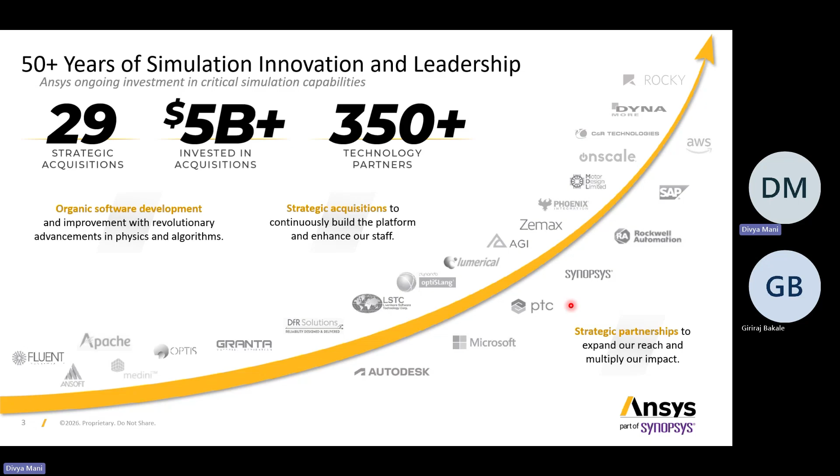And now we are moving on to the core part. Why do we go for simulation? Here's a short video from Ansys.

What do the world's most visionary companies have in common? A superpower. To see the future with absolute certainty. The power to design, to test, and to predict the performance of the most complex products in the universe, all before a single physical prototype is ever built. They summon the world's most powerful engineering simulation solution.

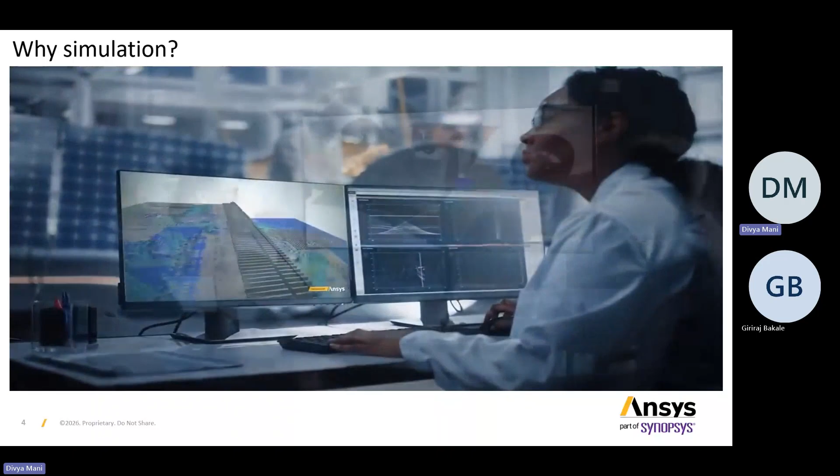I hope you enjoyed the video. Now I would like to add some flavor to the video. Why do we go for simulation? The first and foremost reason is that one can predict the behavior of any component, system, device, or even a scenario virtually, before the prototype is brought into existence.

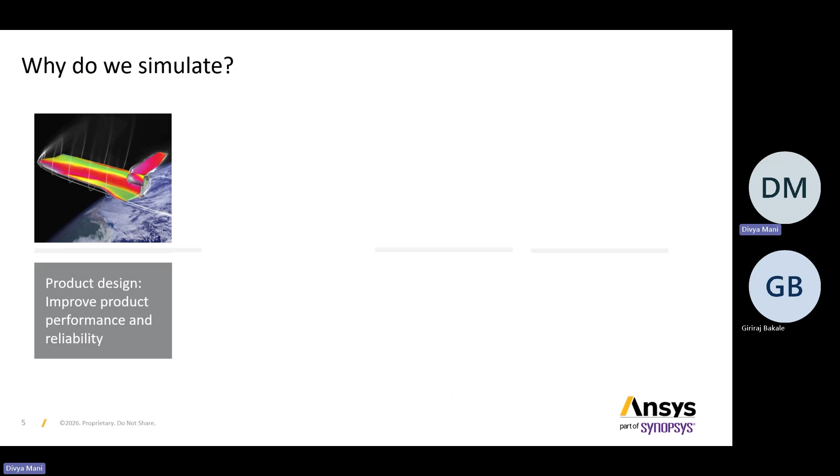On the other hand, if the prototype or the product is not performing well, engineers can use powerful Ansys solutions to optimize its performance, and by doing so, the time and cost of product development comes down drastically.

In case a product fails, we can analyze the in-depth reason for the product failure using powerful Ansys solutions. And finally, when every product comes to market, it has to comply with certain standards like electromagnetic standards - FCC, ISO, CISPR, MIL, etc. - in order to ensure the safety of the equipment, the person, and the environment. All these simulations are virtually possible with powerful Ansys solutions.

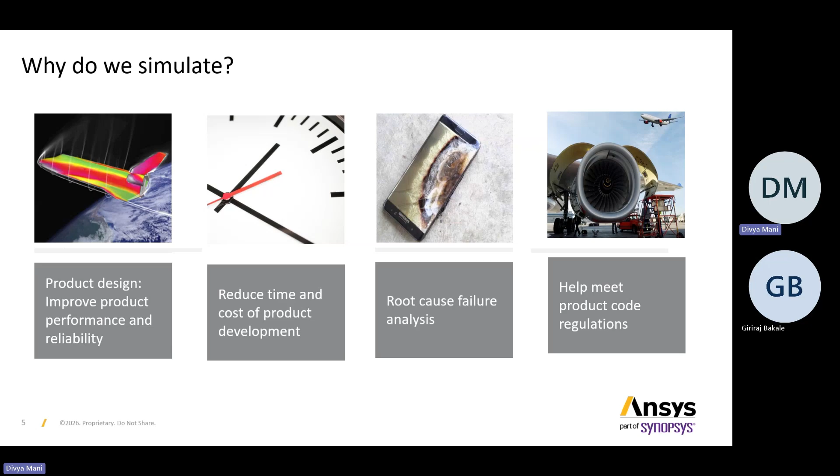To perform such powerful Ansys simulations, Ansys has a simulation portfolio that broadly covers various domains. In case of semiconductors, Synopsys and Ansys have solutions like RedHawk-SC, Electrothermal, Totem, PowerArtist, Raptor-H, Raptor-QU, Exalto, VeloceRF, Pathfinder, PathFX, ClockFX.

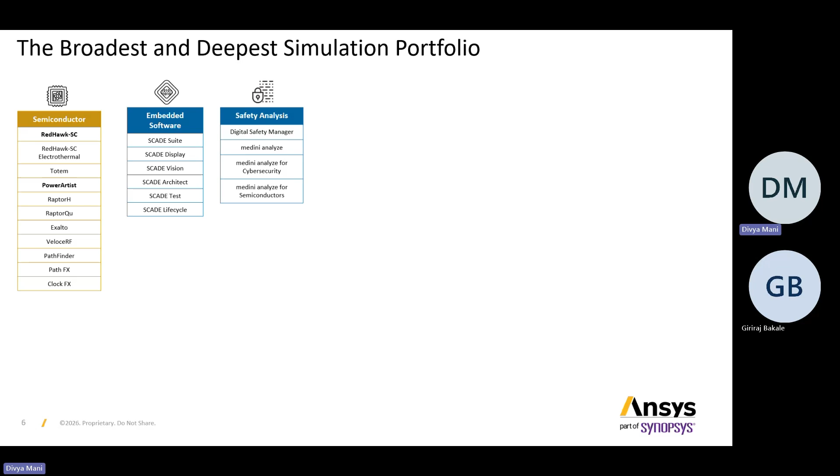For performing simulations related to embedded software, you have SCADE-based packages from Ansys like SCADE Suite, Display, Vision, Test, and Lifecycle. And when you are interested to perform simulations related to safety analysis, Ansys provides many Medini-based packages like Medini Analyze for cybersecurity, and also semiconductors.

Under structures, Ansys provides solutions like Mechanical, LS-Dyna, Forming, Motion, Sherlock, and other solutions. Under fluids, Ansys solutions like Fluent, CFX, Rocky, Turbo Tools, etc. can be utilized.

Moving on to electronics, which is our laser focus today, Ansys provides solutions like HFSS, Maxwell, SIwave, Icepak, Motor-CAD, Q3D Extractor, NuHertz, EMA3D Cable, EMA3D Charge. Among these, MotorCAD and Maxwell come under low frequency electromagnetics, and the remaining solutions come under high frequency electromagnetics.

And for optical domain-based simulations, Ansys provides solutions related to SPEOS, VRXPERIENCE, Lumerical-based packages, and also Zemax packages. And when the user is interested to perform simulations related to materials, Ansys packages like Granta MI, Granta Selector, Granta EduPack, Granta MDS are prominently used.

And for AV-based simulations, Ansys provides software like AVxcelerate Headlamp, AVxcelerate Sensors, and AVxcelerate Autonomy. When you're interested in performing mission-level simulations, Ansys solutions like System Toolkit, Orbit Determination Toolkit are broadly used. For performing sound-based simulations, Ansys has a special software called Ansys Sound.

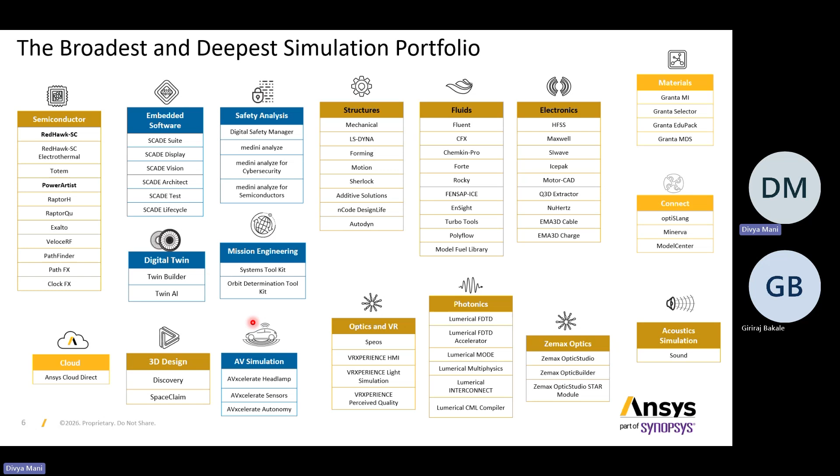Simulation is ubiquitous, where you can find its applications starting from consumer electronics to space.

Moving on to high frequency electronics product collection. First comes HFSS, which is high frequency structure simulator, a powerful 3D simulation software for designing, analyzing, and optimizing RF and microwave components, including antennas, filters, waveguides, PCBs, ICs, connectors, etc. And then comes HFSS IC, which deals with simulations related to a multiphysics and multi-scale platform related to integrated chips. And there is also Q3D extractor, a special software to extract the parasitic RLGC, which is resistor, inductor, capacitor, and conductance parameters from the interconnect structures.

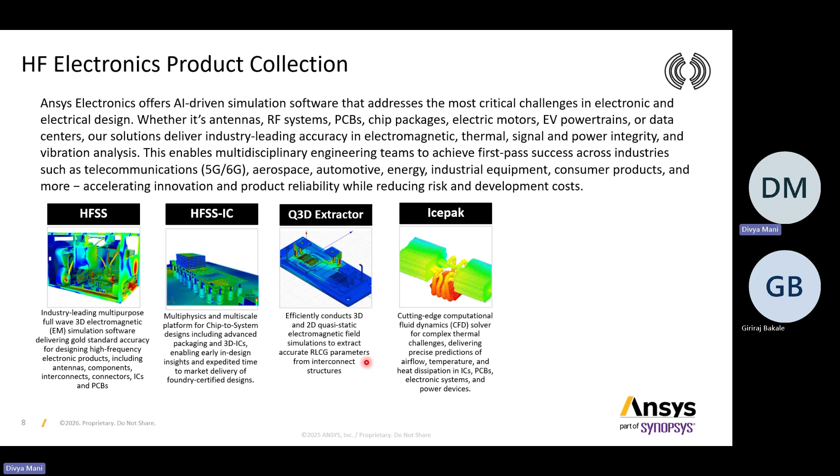Special software from Ansys to deal with thermal-based simulations are Icepak, which performs simulations in PCBs, ICs, electronic systems, and power devices. And then comes SI-Wave, which is signal integrity wave, dealing with simulations related to power integrity and signal integrity concepts inside PCBs, IC packages, etc.

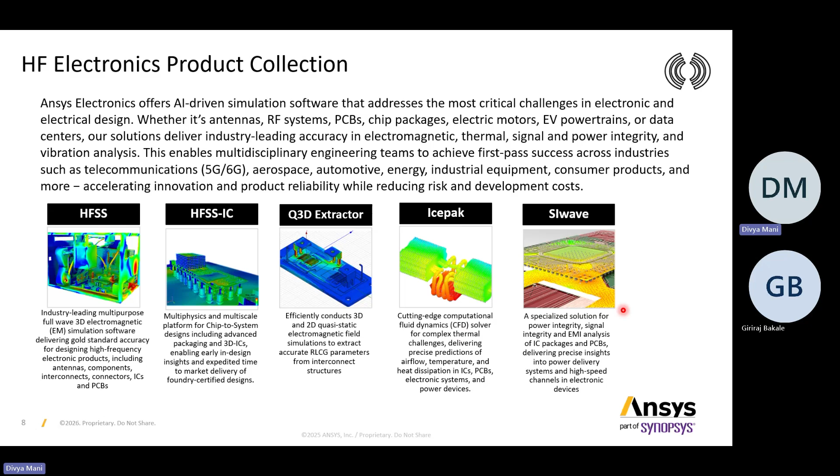As a continuation, we also have EMC Plus that deals with simulations related to electromagnetic compatibility and electromagnetic interference concepts like conductive emission, radiated emission, conductive immunity, radiated immunity, and even cable harness modeling starting from automotive to aerospace applications.

And Charge Plus focuses on simulations related to charging and discharging phenomena like dielectric breakdown, arcing in air, and even lightning effects on aircrafts.

For all filter designers, there are two special softwares from Ansys, that is SynMatrix Filter and Nuhertz FilterSolutions, where SynMatrix Filter will focus on complex 3D filter designs like ceramic filters, SAW filters, SIW filters, and cavity resonator filters. And then comes Nuhertz FilterSolutions, which deals with software simulations related to planar filters that are loaded with lumped elements, and it is very fast because it is automated with AI.

Using powerful Ansys solutions, one can perform simulations starting from nanometer scale to kilometer scale, that is from silicons to systems.

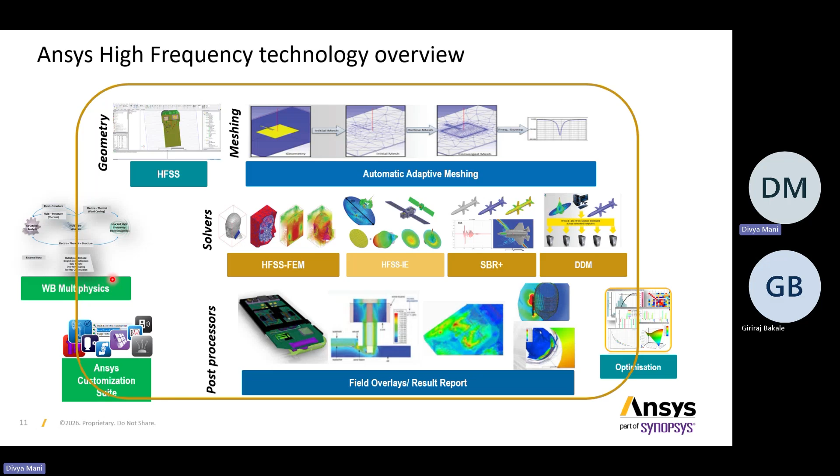Then comes the Ansys customization suite. The best example is the antenna toolkit, present inside AEDT, where you don't need to design an antenna from scratch. You can design an antenna within seconds by providing the resonant frequency and substrate details. Then comes multiphysics, which integrates simulations related to electrical, electronics, optical, mechanical, thermal, and so on.

As mentioned before, there are several solvers involved in HFSS. The first is the frequency domain FEM solver, mainly for targeting complex geometries because it uses finite element meshing, that is, tetrahedral meshing, which conforms very well to complex geometries.

Then comes the time domain FEM solver. This solver is best for transient analysis, like concepts related to EMI and EMC: lightning, conducted emission, radiated emission, conducted immunity, radiated immunity, signal integrity, and power integrity concepts.

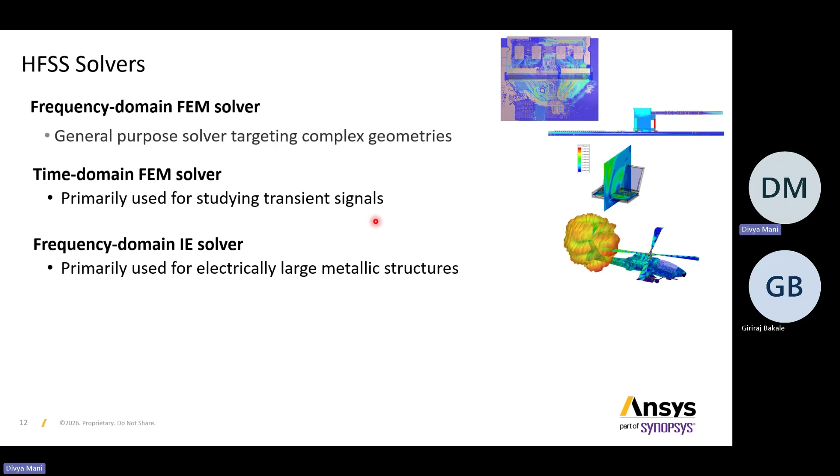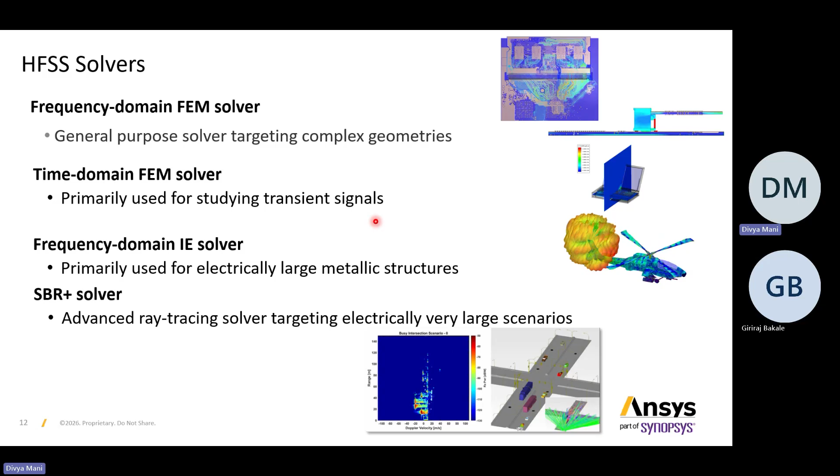Then comes the frequency domain IE solver, which deals with electrically large metallic structures and solves Maxwell's equations in integral form. Finally comes the SBR+ solver, the advanced shooting and bouncing ray solver, used for electrically large scenarios like automotive radar simulations, antenna placement analysis, and even radar cross-section analysis.

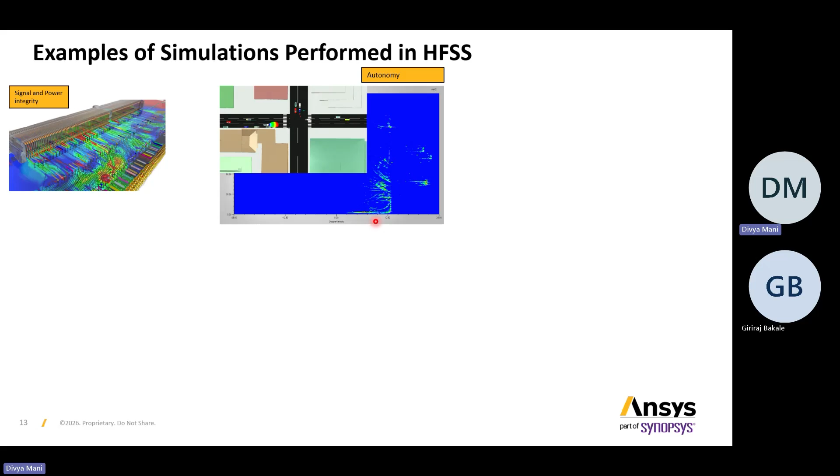These are some examples of simulations performed in HFSS, like signal integrity, power integrity, automotive radar simulations, and designing RF filters. We can also perform RF co-site analysis inside an aircraft, where you have two antennas placed inside a large platform, and you can analyze how the interactions between the antennas take place with respect to the platform.

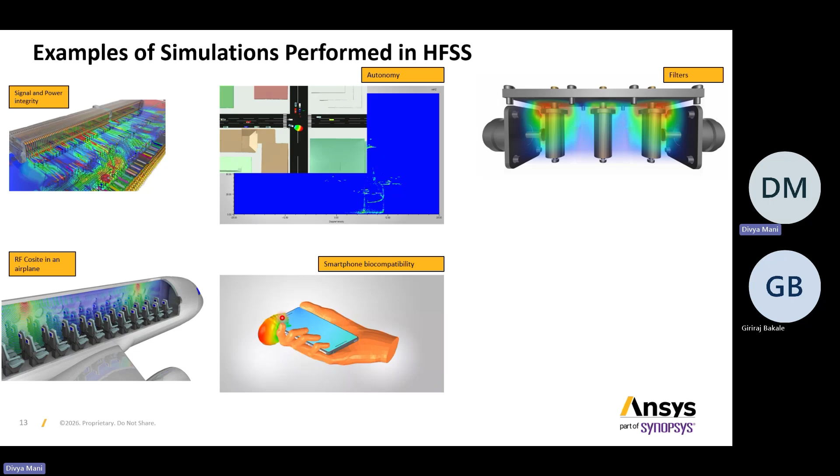Then smartphone biocompatibility, where you have different phantom models from Ansys, like head model and hand model, and you can place your mobile phone along with your antenna and even perform SAR analysis, specific absorption rate, which tells how much RF energy is being absorbed by human tissue. Finally comes antenna placement analysis, where you check how the antenna behaves in different environments.

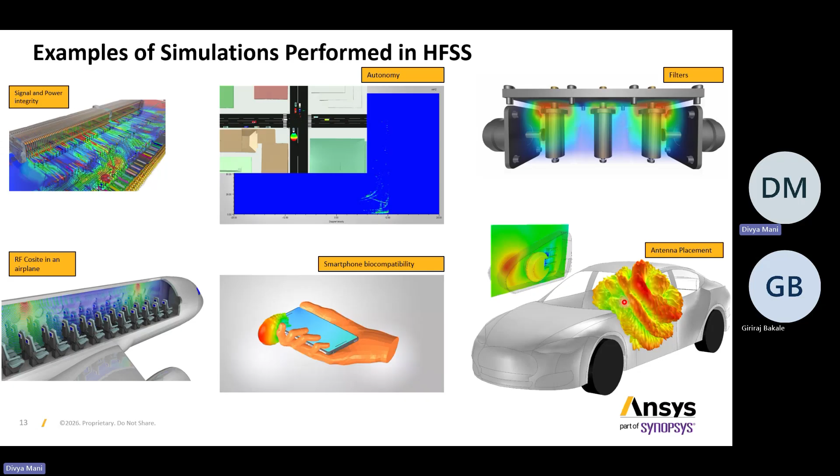Simulations generally take place in four stages, starting at the component level, system level, then platform level, and finally scenario level. For this, let me take the example of an antenna, where I initially start designing an antenna as a single element, and then from the single element, I design an array of antennas.

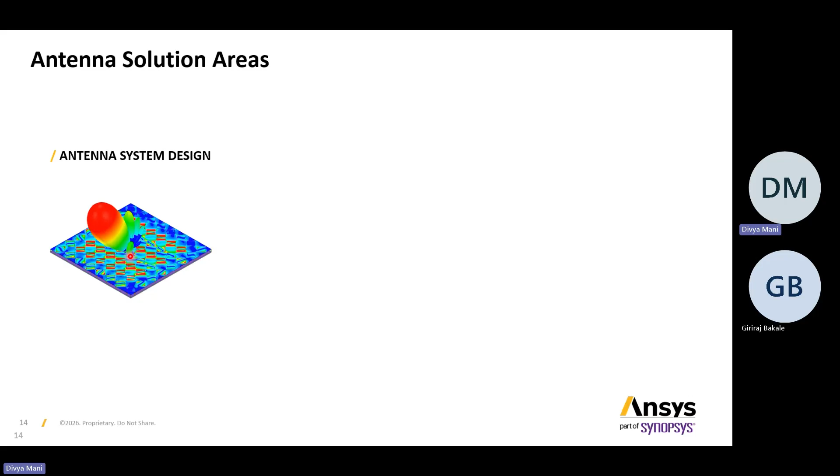And then I place this array of antenna on a platform like a street light, a car body, or a truck, and then analyze its performance, and finally take this to the scenario level where different platforms are integrated to mimic real-time scenarios.

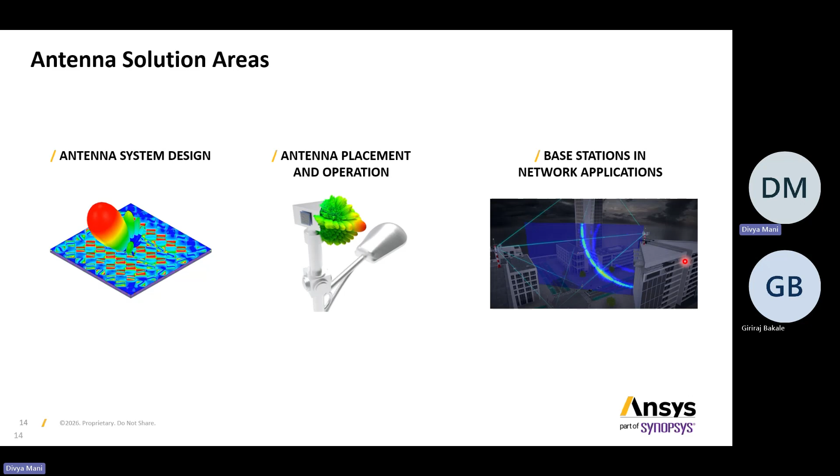Now we are moving on to 5G millimeter wave beamforming and phased array antenna design. 5G millimeter wave generally deals with frequency, and I have chosen a frequency of 28 gigahertz.

When it comes to antenna arrays, there are two parameters which are inseparable: beamforming and beam steering. Beamforming is about creating a focused beam using antenna array elements, while beam steering is steering this focused beam towards the intended direction without moving the antenna physically.

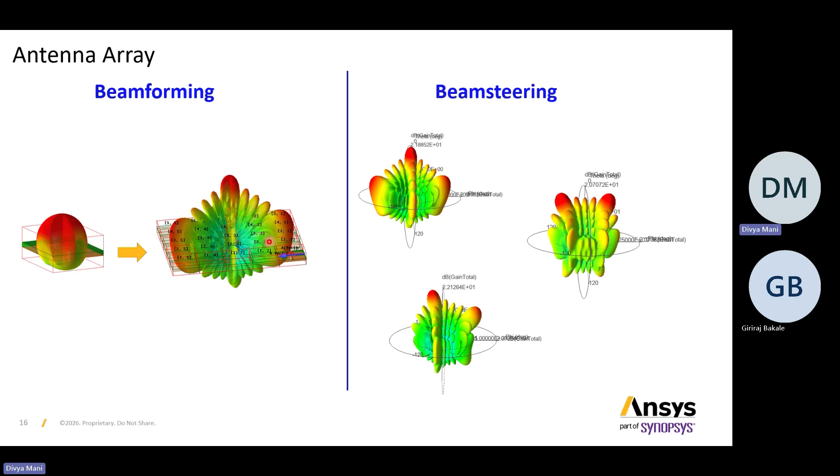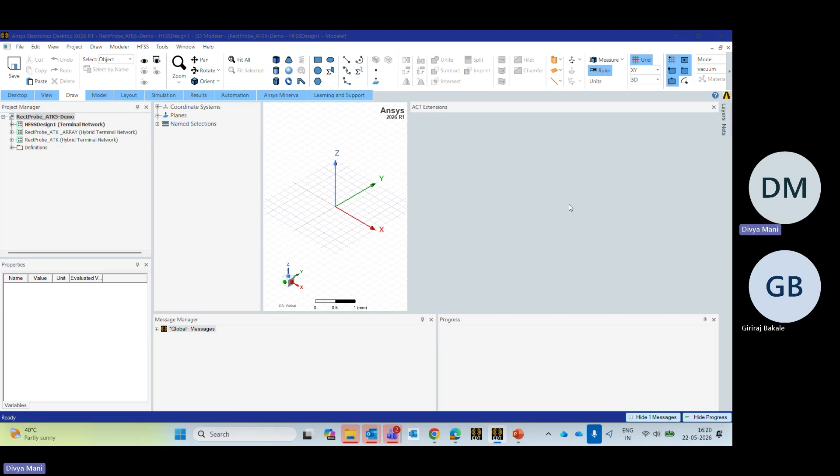Now we are moving on to the demo part. I am going to start my design with a single patch antenna. So I'll go to View, ACT Extensions, Launch Wizards, HFSS Antenna Toolkit.

Once your antenna toolkit is launched, you will be able to see different antenna types. Now we are interested in the patch antenna, which is rectangular patch antenna. So click on rectangular patch antenna and provide your center frequency. Our center frequency is 28 gigahertz, so enter the center frequency.

The next step is substrate dimensions. Choose a proper material you're going to work with. Click on edit, and I'm going to choose Taconic as the substrate, which you can access from the material library. Search for Taconic TLX9 and click OK. The height of the substrate from the datasheet provided by the company is 0.79 mm, which in centimeters is 0.079.

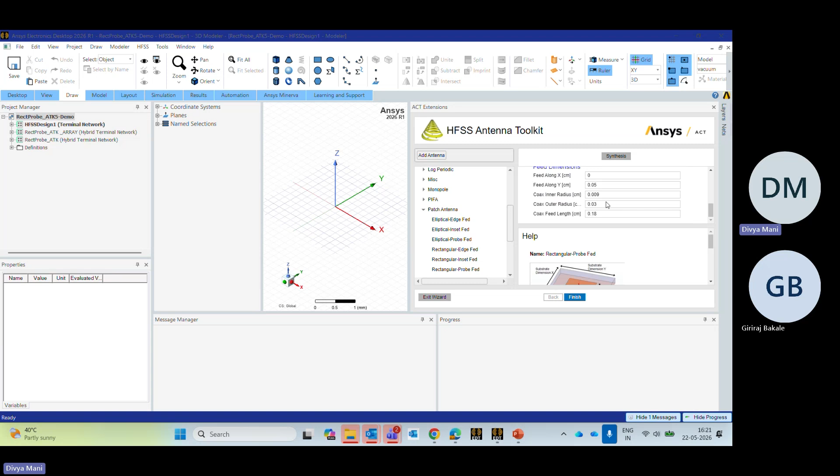Once these details are provided to the antenna toolkit, click on synthesis. Once I click on synthesis, you will be able to see the substrate dimensions, antenna dimensions, feed dimensions, everything updated within seconds. Once this is done, click on finish.

This process will import your antenna design into your HFSS design environment with all the pre-processing steps. I'll close this ACT extensions.

I'll expand the model under the history tree. Under PEC, we have the perfect electric conductor. We have the coaxial pin, feed pin, and a port cap. And Taconic is assigned to the substrate. Under Teflon, you have the coaxial.

And then perfect E is assigned to the antenna and ground, and wave port is assigned as an excitation for the coaxial feed.

Inside your project manager window, you will be able to see, if you expand the boundaries, where antenna, outer coaxial cable, and ground are provided with PEC boundary conditions, and excitation where your coaxial cable cross section has been excited with the wave port.

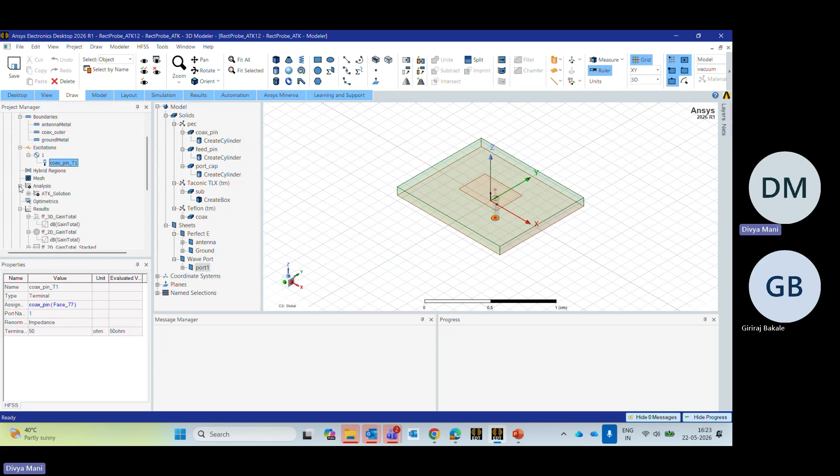Then expand the analysis where you will double click on ATK solution, where you will see your frequency which we have given at the antenna toolkit design initial step, which is 28 gigahertz, and see number of passes 15, and the maximum delta, which is our convergence rate, is 0.02, and give OK.

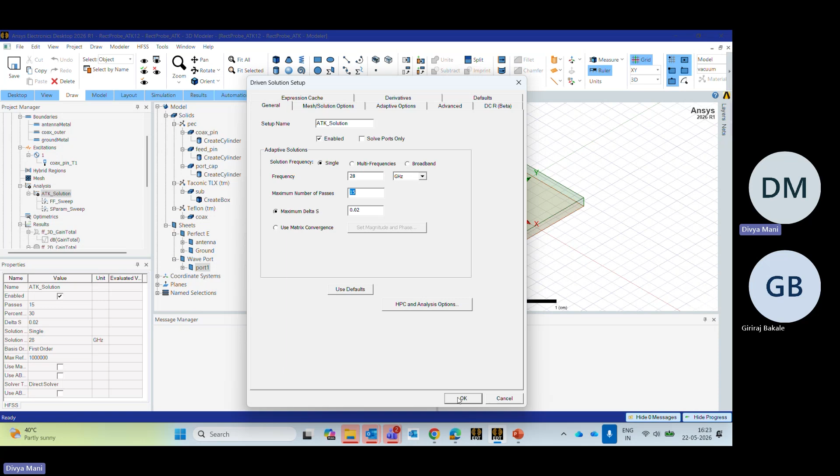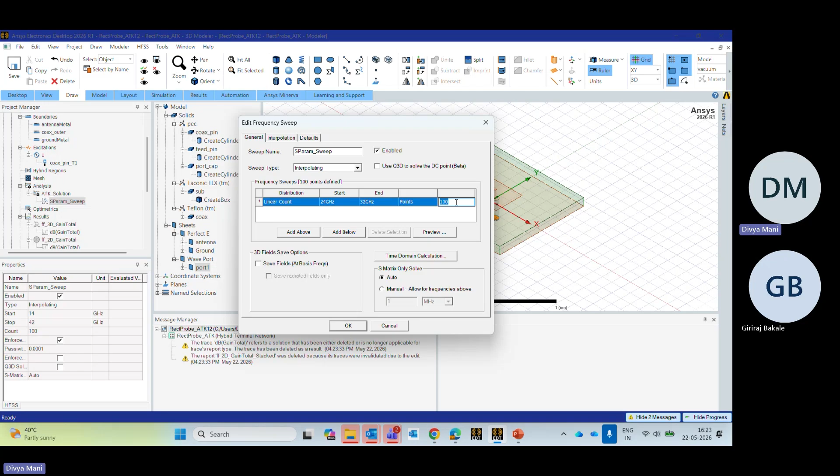You have automatically two different sweeps, so we'll only focus on one sweep, we'll delete off the other sweep. Double click on S parameter sweep, where my antenna is going to provide results from 24 gigahertz to 32 gigahertz. I'm just shortening the span of the frequency and increasing the number of points to 201, and give OK.

Under results, you will be able to see the software has automatically provided results related to 2D, 3D radiation patterns, return loss, and input impedance in terms of Smith chart.

When you expand this radiation, you don't need to set up your infinite far field setup, this is automatically done by the software. For 3D, phi varies from minus 180 to 180 and theta from 0 to 180 with step size of 2.

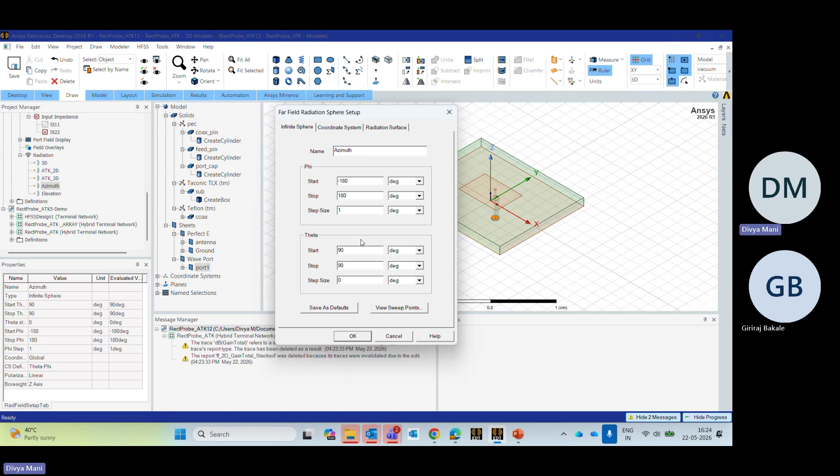Then comes azimuth plane, which is my horizontal plane, where phi varies from minus 180 to 180 with step size of 1, and theta varies from 90 to 90 with step size of 0. For the elevation plane, phi varies from 0 to 90 with step size of 90, and theta varies from minus 180 to 180 with step size of 1.

This is all about the pre-processing steps. Everything is being done by the software itself. We have to check for errors and move on to the simulation part.

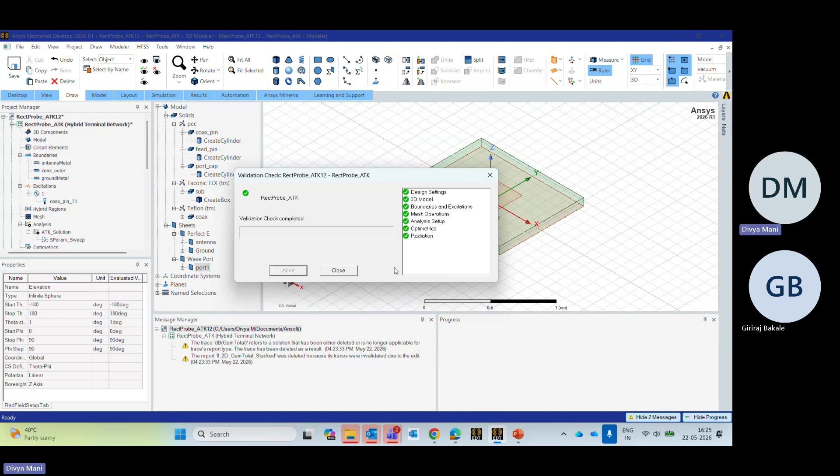Go to HFSS, click on validation check, and check for any errors or warning messages. Everything is green, so there are no errors or warnings. We'll move on to the next step, which is the analysis part. Again, go to HFSS under your menu bar and click on analyze all.

Let's wait for the software to complete the simulation.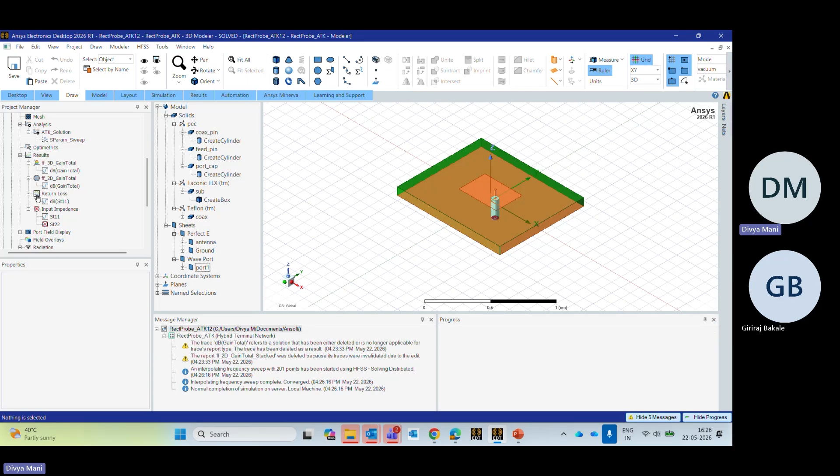Yes, the simulation is complete now. The very first thing we are going to focus upon for the microstrip patch antenna is return loss. Let me check the resonance. Where is the resonance happening? So, right click on marker, add X marker.

I can see two values, resonant frequency and also the return loss. My antenna is actually resonating at 26.53 gigahertz with return loss of minus 4.29 dB, which is very low. My performance of antenna is very poor.

So let's check for other results also. Radiation pattern, my max gain of the antenna is 7 dB. That is acceptable. And this is 2D and 3D radiation patterns, with phi equal to 90 and phi equal to 0 degree.

And input impedance, this is trace of S11, which shows my antenna is not closer, like the trace is not closer to the center part of the Smith chart, where there is a lot of mismatch happening inside the antenna. So this has to be taken care of.

To optimize this antenna, after performing certain optimization processes like parametric analysis, tuning, and also optimization, I have come up with some modifications inside my parameters. So I am going to update those dimensions.

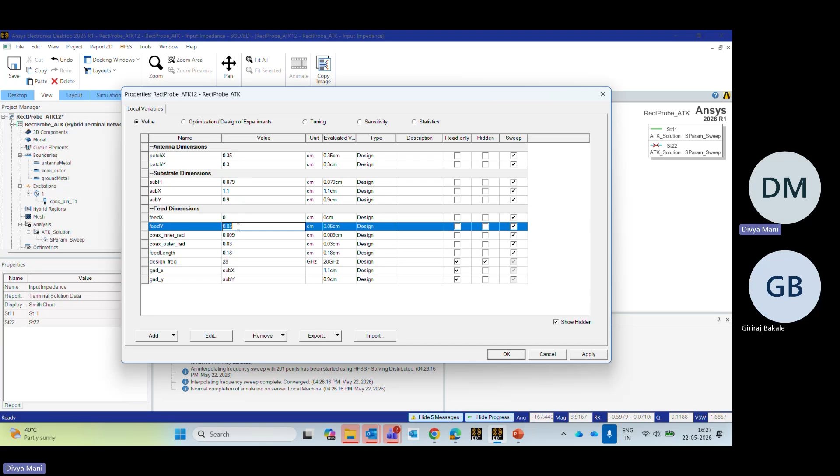So go to HFSS, design properties, and I've come up with patch X as 0.35 and patch Y as 0.3, and my feed point Y is 0.05 centimeter. Apply and OK. Now I'll go to HFSS and check for validation.

There are no errors and warning messages. Again, I'll resimulate the design and check for my return loss and other parameters. Sometimes these types of errors can occur, but it is our responsibility to optimize it so that we get a good product outside.

Yes, my antenna has come, my software has completed its simulation. Let me place this marker at the resonance point, that is the sharp resonance point, which is 28.1 gigahertz with return loss of minus 45.18. My antenna is performing very good.

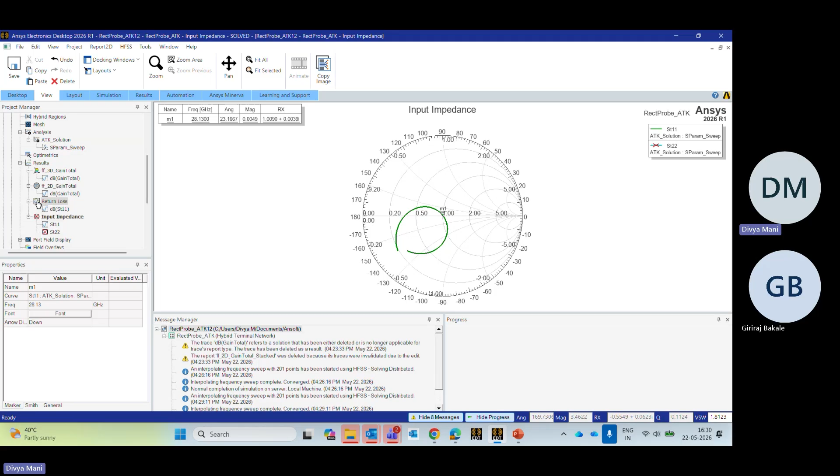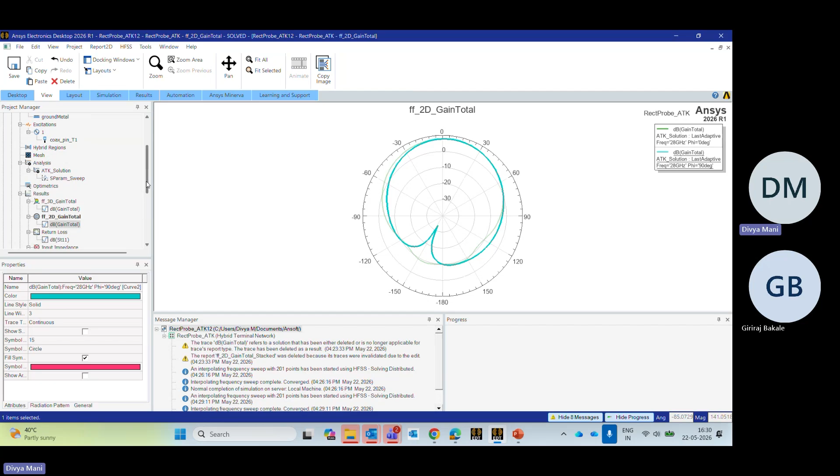Then in case of 3D radiation pattern, in terms of gain, it is 8 dB. Then for the 2D radiation pattern, the green trace represents phi equal to 0 degree, and the blue trace represents phi equal to 90 degree. My antenna has been performing very well.

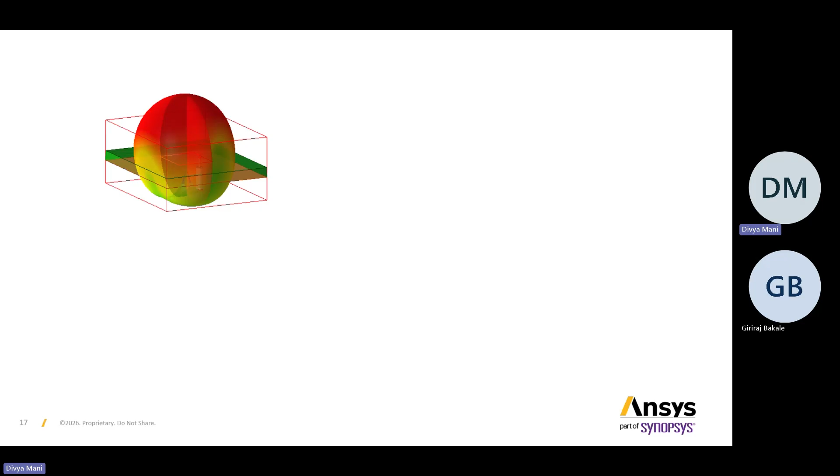Now my unit cell of the antenna is ready. We have successfully completed the design of the microstrip patch antenna that is resonating at 28 gigahertz, and analyzed its performance in terms of return loss, the radiation pattern in 2D and 3D, and also impedance matching in terms of Smith chart.

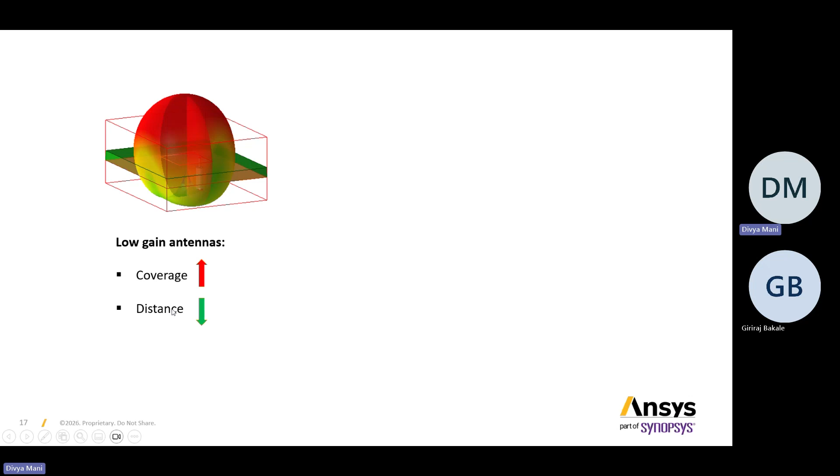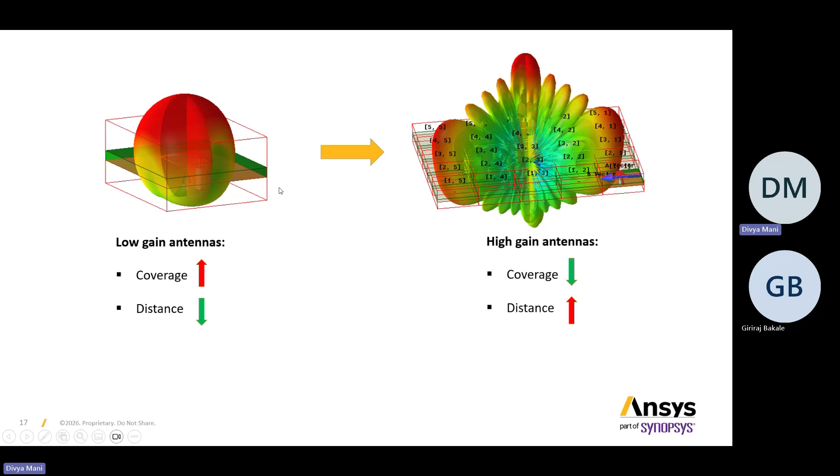Generally, low gain antennas will have broader coverage but will travel only for shorter distances. What about antennas for longer distance? This problem can be overcome by designing high gain antennas, which provide shorter coverage but can travel for longer distances. So the best possible way is to create an array from the single antenna element as shown.

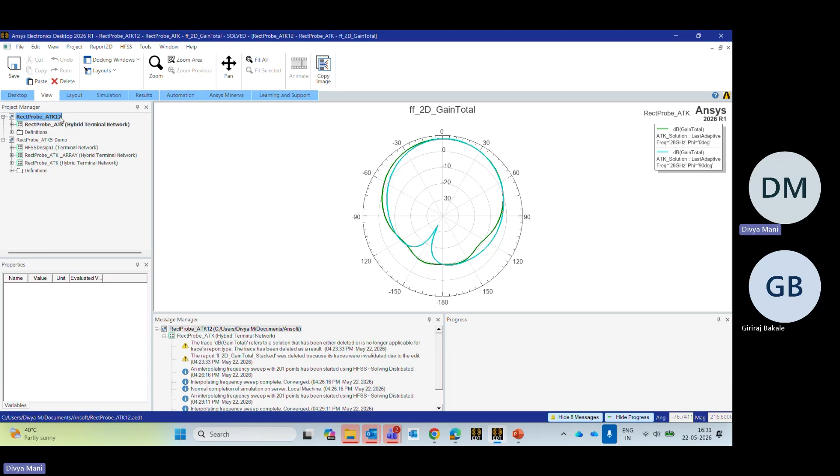Once our unit cell is ready, now we are going to create an array from the unit cell. So to do that, I'll copy paste the design. Right click on the HFSS design, copy and paste it under your project. Just rename it so that you don't have any confusion. I'll call it 'create array'. Okay.

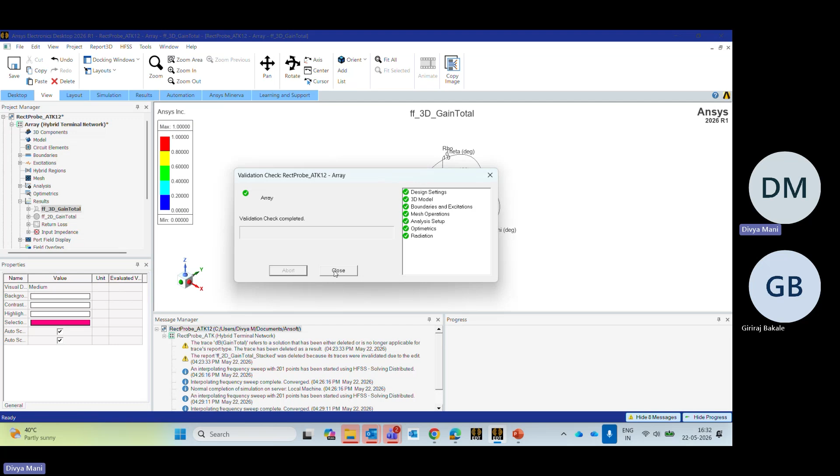So expand this, double click on the design. Again, I think I have to re-simulate the design so that I can work upon this. So I'll again re-simulate this design. Go to HFSS, validation check, and then HFSS and analyze all.

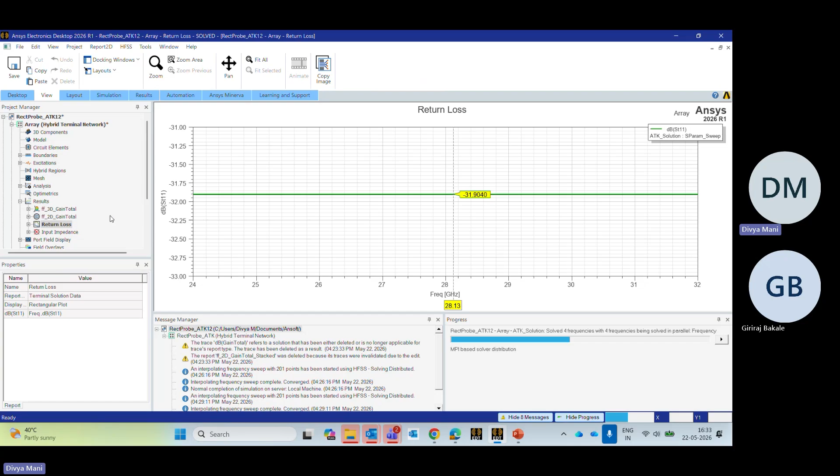Yes, my antenna has completed its simulation. I'll save it. Before creating an array, I'll go to this model. Some modifications have to be done with respect to the radiation pattern, that is the boundary.

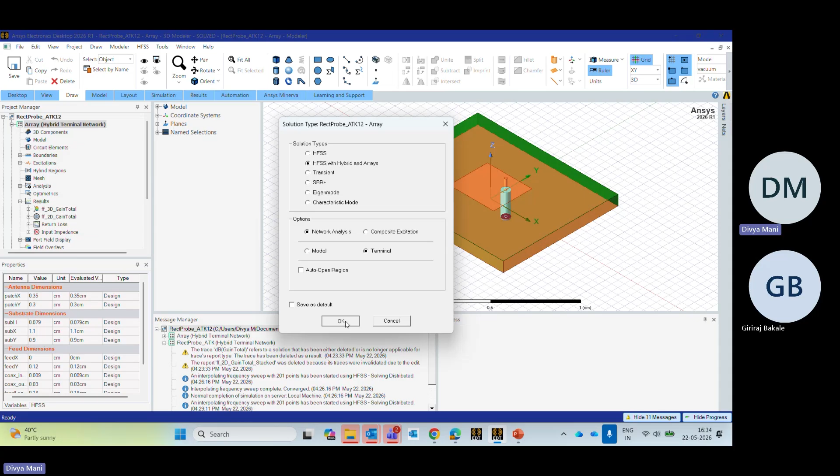First step is to right click on the array model, solution type, and uncheck the auto open region, then click OK. Once unchecked, you will see a box surrounding the antenna - this is the radiation box. Expand boundaries and you will see additionally the auto open region, which is my radiation surface for the antenna.

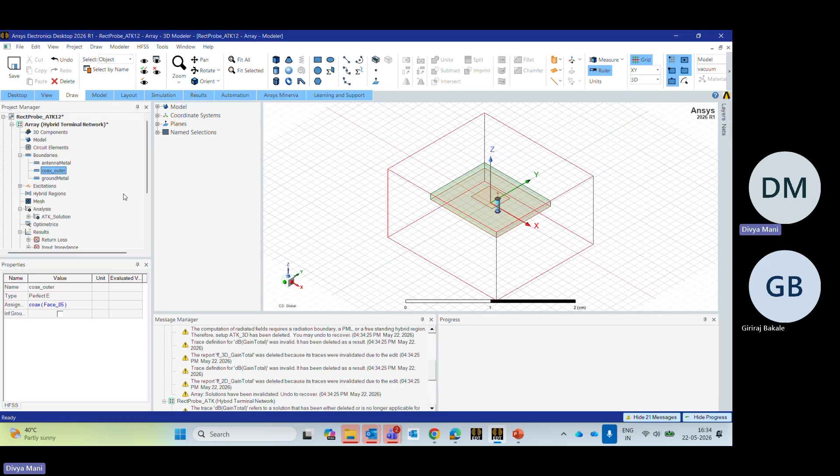To create an array, I cannot proceed with this radiation box, so I need to delete it. Delete this auto open region. Then under model, expand the solids and sheets. Go to solids, and you will have radiating surface and create region.

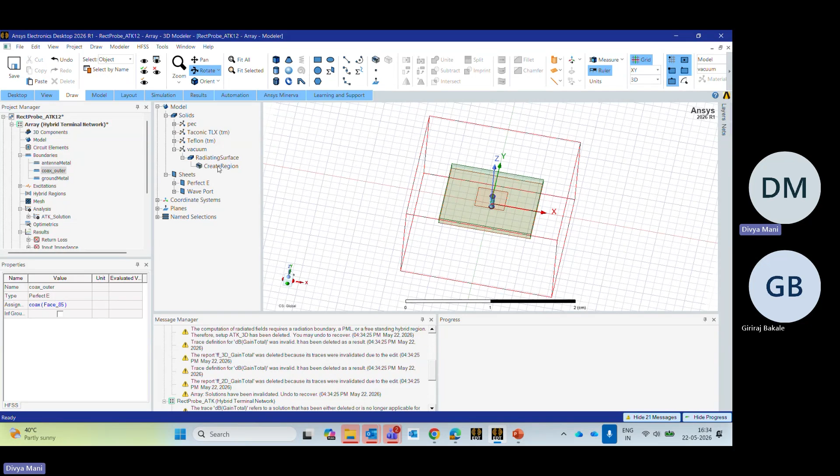Now I'm going to create a region around this unit cell which is bounded - there should not be any gap inside along the x and y axis. I'm going to make my boundary bounded, no space around the x and y axis. So I'll double click on create region and remove all the padding distances along x and y axis, and increase the padding distance along the positive z direction, then apply and OK.

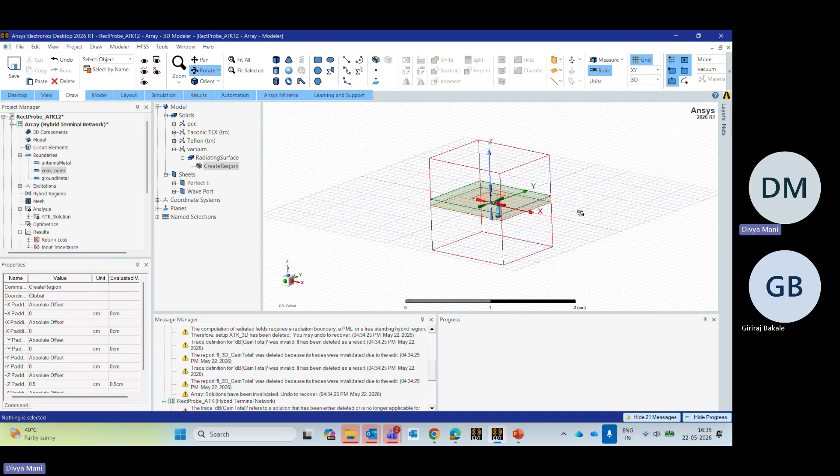And now you can clearly see my boundary is very bounded to the antenna structure. There is no gap with respect to the x and y directions.

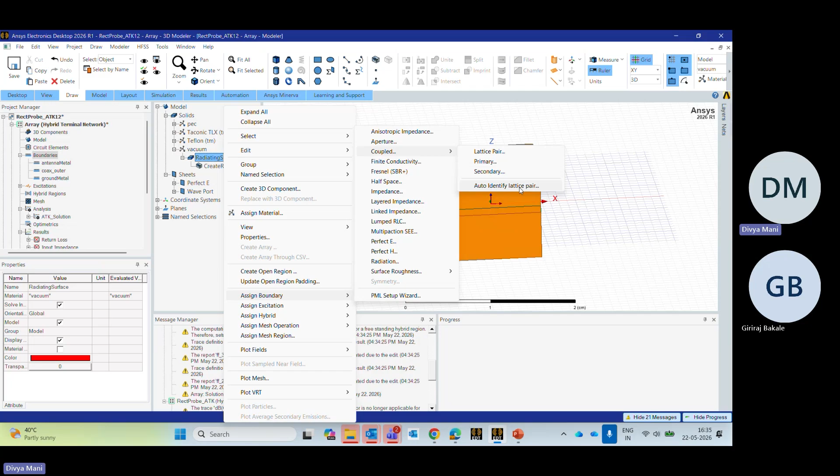Now we are going to provide proper boundary conditions. Right click on the radiating structure, go to boundary, coupled, and you have four options: lattice pair, primary and secondary, and auto identify pair. Click on auto identify lattice pair, and it will ask for a plane like xy, yz, or xz. We are moving along the xy plane, so click on xy and give OK.

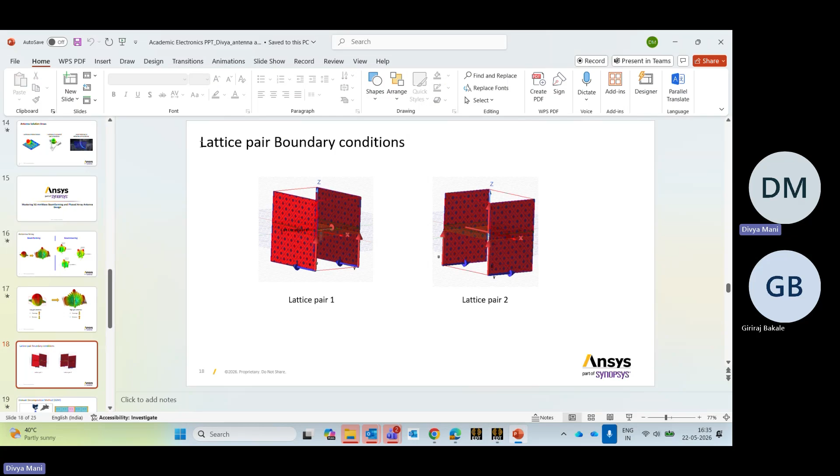Now I'll tell you what lattice pair boundaries are. Lattice pair boundaries or coupled boundary conditions are generally required to create array structures, which means these lattice pairs will enforce periodicity by mapping the fields on the primary boundary towards a secondary boundary with a certain phase shift. This phase shift will enforce a certain phase delay along the entire array. This phase delay will help us steer the beam in any direction, along theta, the elevation angle, or phi, the azimuth angle.

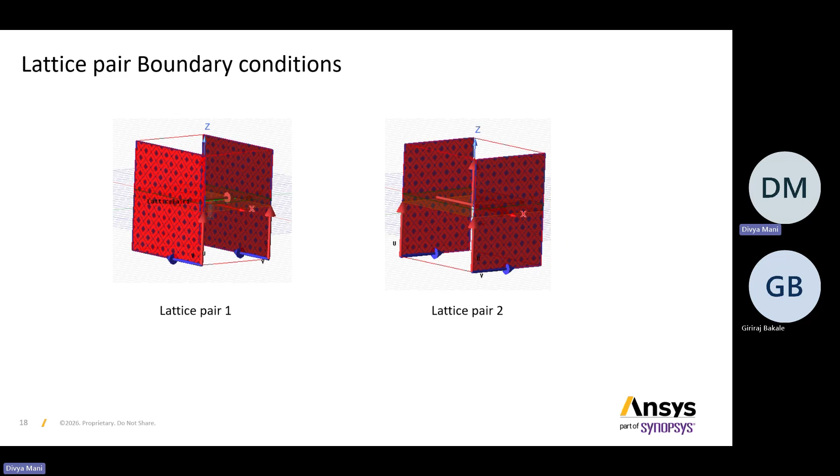Under boundaries, you can see two lattice pair boundaries are created, which act as side walls for the creation of arrays.

When you double click on lattice pair 1, go to phase delay, because we need some delay to steer the beam. This phase delay can be created using scan angles, along theta and phi. If you know the phase delay, you can provide it directly, but we'll move with phi and theta instead of giving the values directly.

I'll provide a variable so that I can tune or parameterize it in the future. So I give phi scan with unit of degree, and theta scan, again with degree as the unit, and click OK. Once I give OK, this variable phi scan will be added. I'll provide a value of 0 degrees, under angle unit type, and give OK. This also repeats for theta scan - 0 degrees with unit type of angle, and give OK.

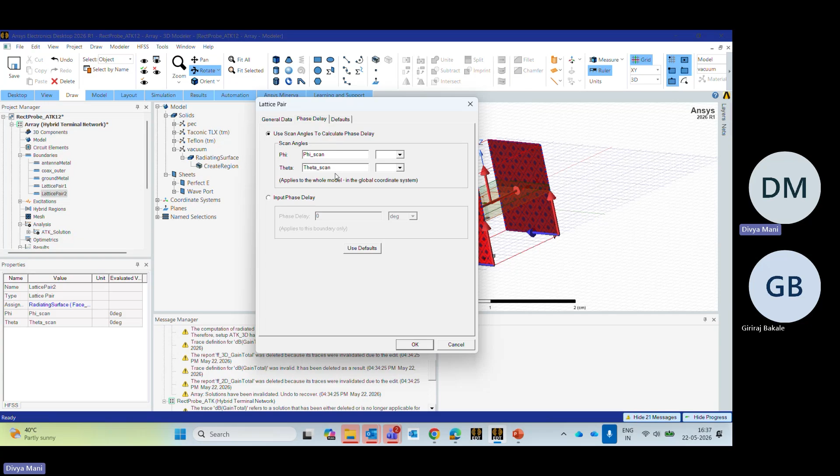Once this is done, we'll double click on lattice pair 2, where you will see it has automatically taken the scan angles from phi scan and theta scan, from the primary lattice pair 1.

The next step is to assign radiation to the top and bottom of the radiation box. I'll go and select the faces. To select faces, I'll right click and change my selection mode - the first option is the selection mode, enabled here. Go to faces, click on faces, select the top, rotate, escape, then hold control and select the bottom face. Now my top and bottom faces are selected.

I'll right click, assign boundary, and provide radiation boundary conditions to it. This means my lattice pair 1 are the side walls for the array, and radiation will be for the top and bottom of the boundary.

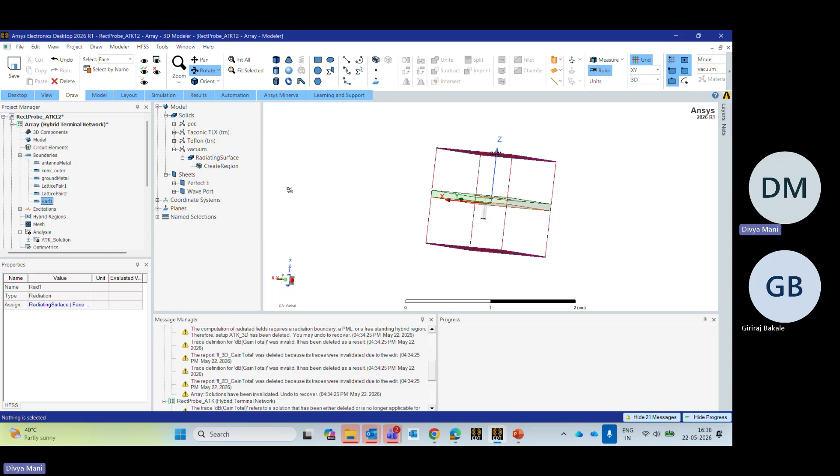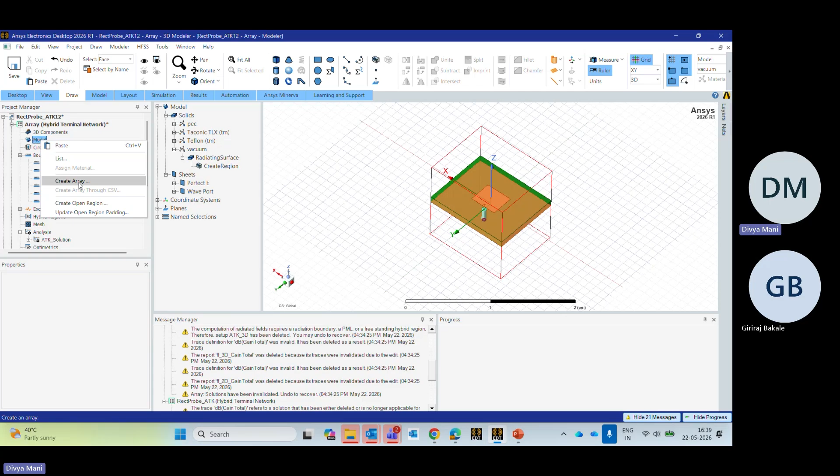Once this process is done, I'll go and create an array. Right click on the model, create array - only when you provide this lattice pair boundary conditions will you be able to create an array. This option will be enabled inside the HFSS design environment. So click on array, and provide a name for the array - I'll create an antenna array and just give it the name antenna array.

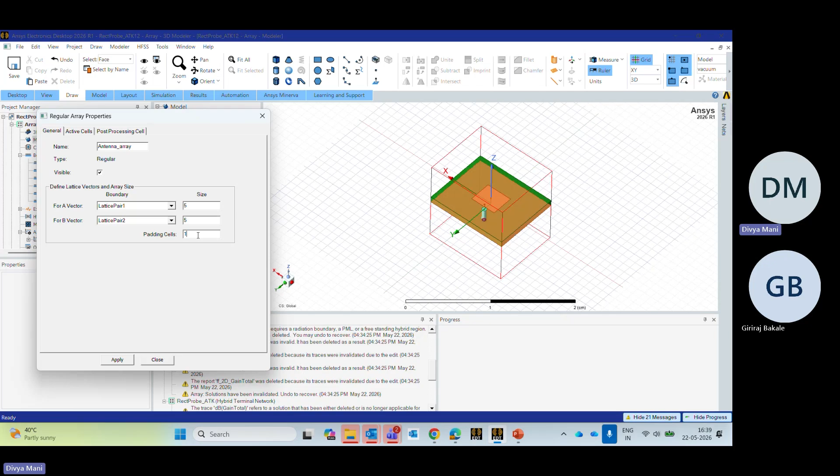Let me make this visible. My A vector is going to be along lattice pair 1 and B vector is going to be along lattice pair 2, with size of 5 cross 5. I'm going to create an array size of 5 cross 5 with number of padding cells as 1. Padding cells are like buffering cells — the geometry will not be present, but they will help with the radiation features. Then move on to active cells, where this is how my 5 cross 5 array antenna will look.

Then in the post-processing cell, I'll make my center antenna active and click apply. Once I click apply, inside my HFSS 3D modeler window, I'll be able to see the 5 cross 5 array by clicking Control D.

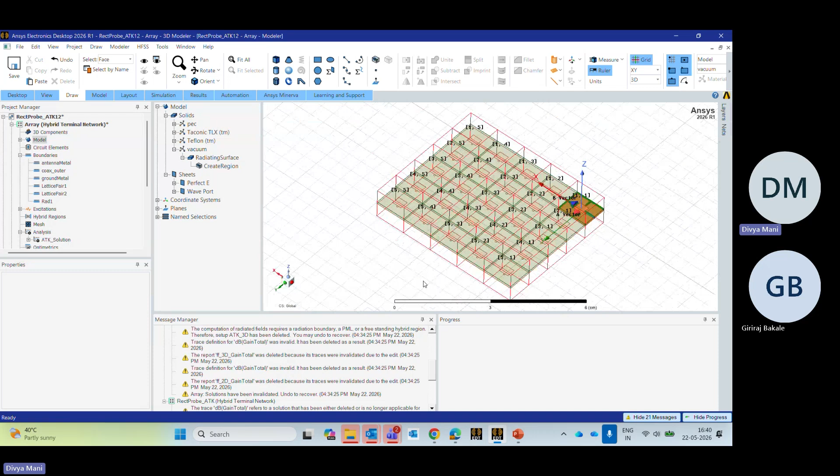I'll be able to see the entire view. Under orient, you can click on top. Now you can see there is a 5 cross 5 antenna element created from the single unit cell, that is a single microstrip patch antenna which is probe fed. The antenna elements will be named 1,1, 1,2, 2,1, 3,1, and so on, up to 5,5.

The next step is to right click on excitations, edit sources. Since we created this antenna array only from the unit cell, that cell alone is excited and provided with 1 volt. I want to excite the entire antenna array, providing uniform excitation — so I'll provide 1 volt to all the antennas in the array.

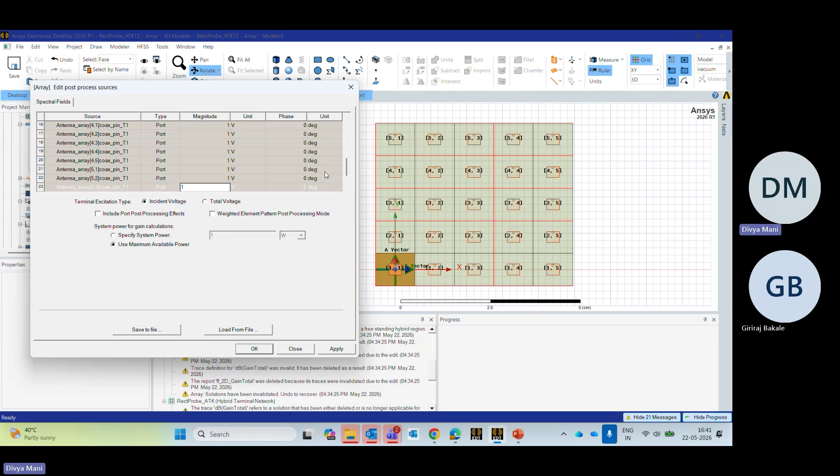Apply and OK. Then click on the analysis part.

This analysis part is where my entire antenna array is going to resonate at 28 gigahertz. I'm going to reduce the number of passes for saving computation time, and set the maximum delta to 0.02.

Under mesh operations, in solution options, I'm going to solve this using the domain decomposition method, not the direct solver. So click on domain decomposition method.

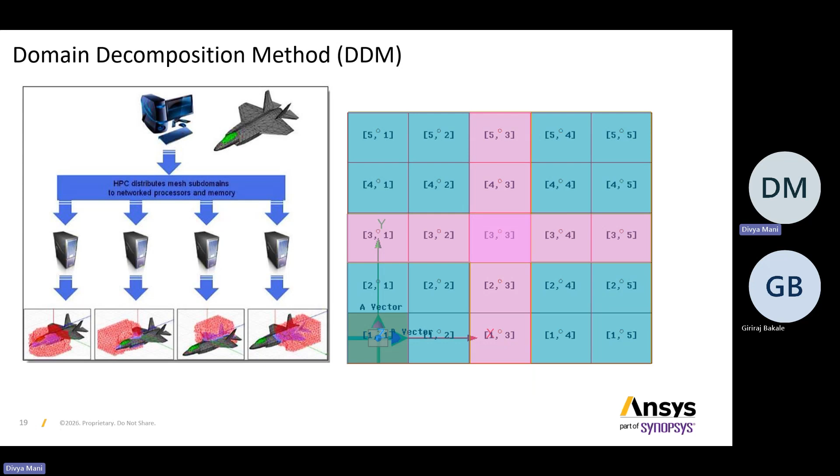The domain decomposition method is generally used when you have a larger or huge electromagnetic problem, like an aircraft — this will be divided into smaller subdomains, and each subdomain will be solved using the HPC method, that is high performance computing, which shares the networked processors and memory. Finally it combines the results simulated by different domains into a single result and provides it to the user. In our case, it's a 5 cross 5 array antenna, where each domain will be solved by different cores in our laptop and finally integrated and provided to the user. That's all about the domain decomposition method.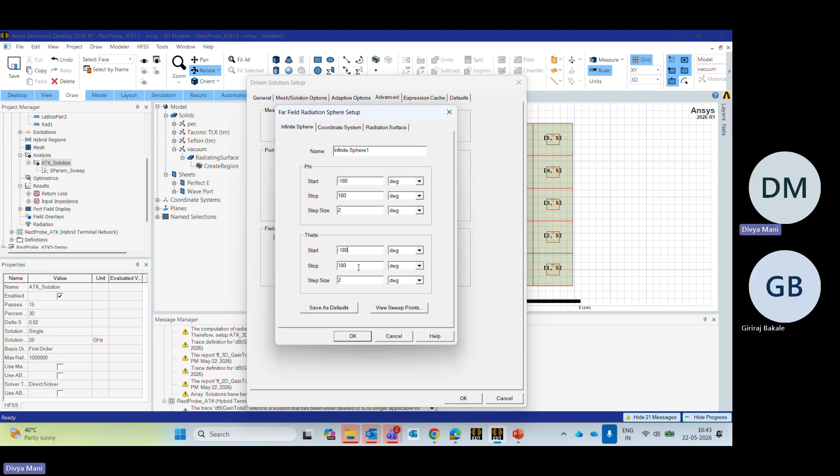The next option is, under advanced, I'm going to view the fields as far field. I want to create a far field here. My phi is going to vary from minus 180 to 180 with a step size of 2, and theta is also going to vary from minus 180 to 180 with a step size of 2, then give OK.

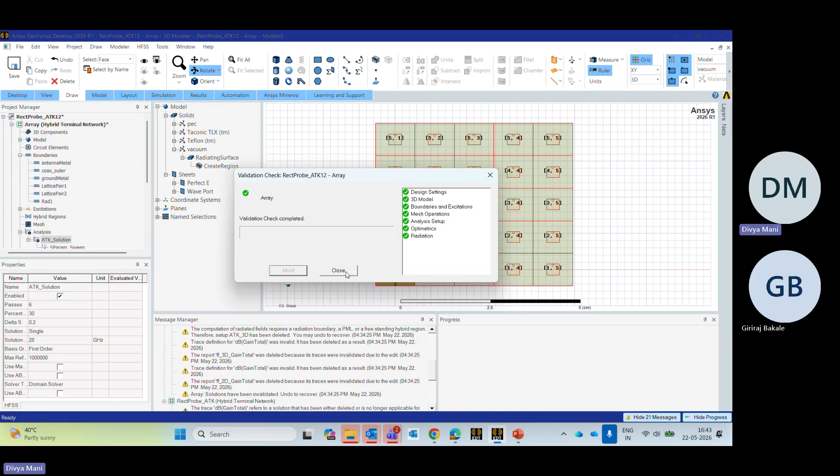Yes, this has been set up — I'll give OK, and keep the remaining things default. This is all about the pre-processing steps. Now we'll go and check for any errors and warning messages. There are no warning messages or error messages, so we'll proceed for simulation.

I'll go to HFSS and analyze once again. This array analysis takes some time to simulate, so I have a simulated project already, which I'll open.

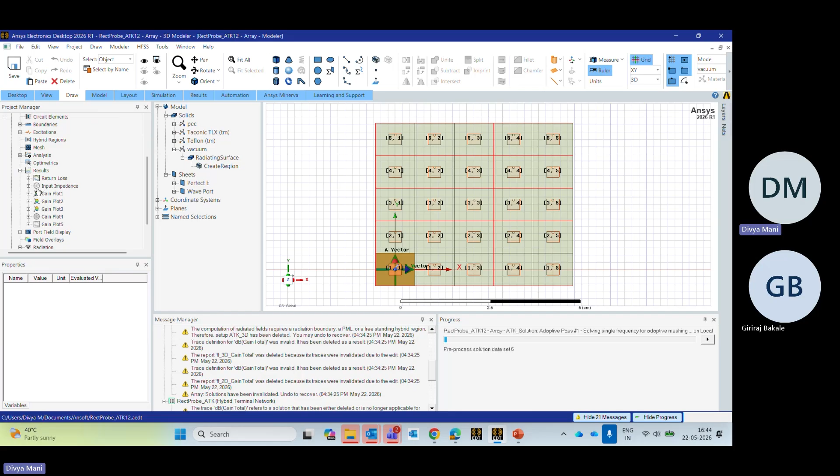This is the 3D model array element, and this is the gain plot. Let me make this gain plot visible on the array — right click on gain, show in the modeler window, go to HFSS and double click it.

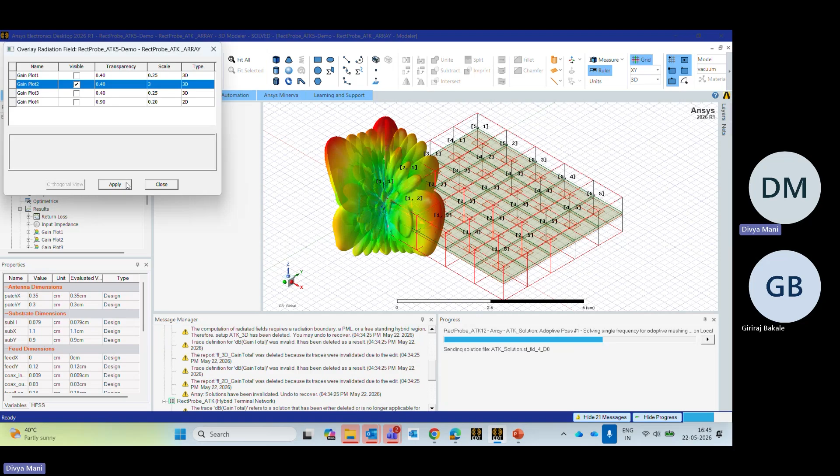Now Control D, right click on it, plot fields, radiation field, and increase the scale size to 3, then apply and see how your radiation pattern looks. You can still increase it more by increasing the scale, and close it.

Since I want it at the center of the array, I can place a relative coordinate system and then look at my radiation pattern at the center.

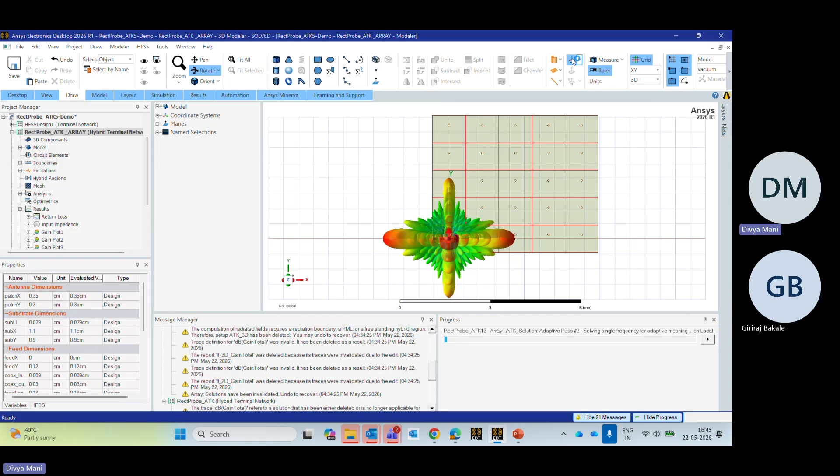Orient top. Now I'll go to the draw tab, where you will find the offset option. Click on offset and go to the center array—it's like the center element of your array. This is the RCS point where I want my radiation pattern to sit.

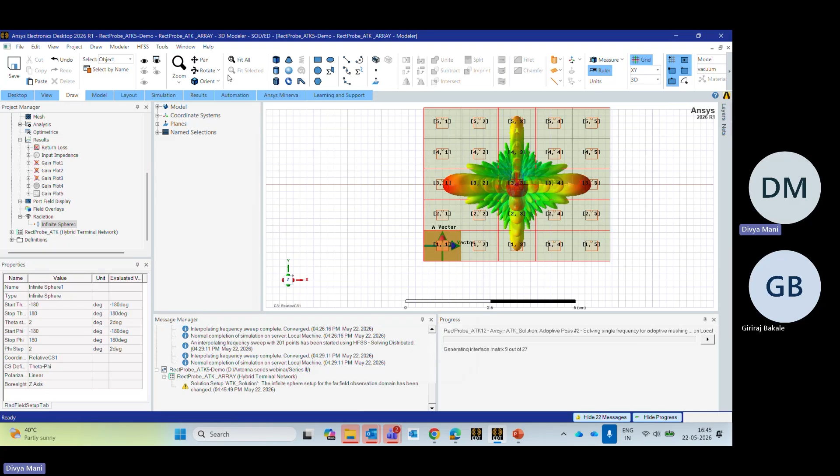Then I'll go to radiation. Under radiation infinite sphere, for coordinate system, you can use local coordinate system, that is RelativeCS1, and give OK. Now my radiation pattern is setting aligned to the center of the array. And this is how my radiation pattern looks—I have created a focused beam, and these are the side lobes of the antenna array.

This is about beam forming, and I also checked the gain. My gain of the antenna is 21.9. Earlier, my gain of the single antenna was 8 dB. Look at the change—from 8 dB to 21.9 dB, that's about 14 dB, such a drastic improvement. So this is the best option for increasing your gain and also creating a focused beam.

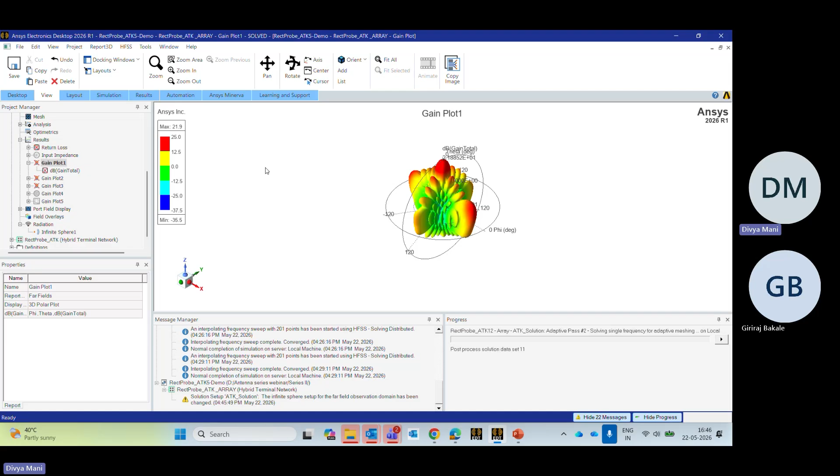Up to this point, it's all about beam forming—you have created a focused beam using the array of antenna elements. The next part is we are going to steer this focused beam towards any direction, either along the azimuth plane or the elevation plane.

To do that, we have to do some post-processing steps to create a progressive phase shift. This can be created using an option called toolkit. Before you perform your simulation, you will have an option called finite array beam angle. So you have to initiate that and click on edit sources and check.

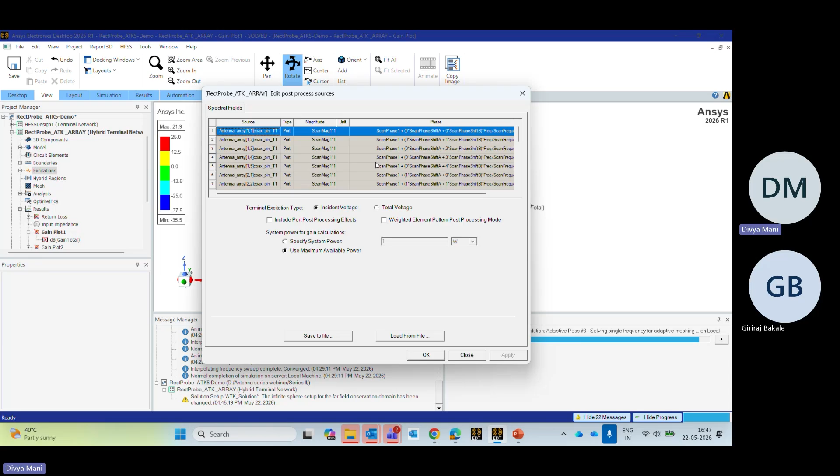Now under your excitations, click on edit sources. You will be able to see all your phase shifts and inputs changed according to the finite array beam angle inputs, which is no longer just 1 volt or 0 volt. Now my antenna array has been excited with some progressive phase shift. Once I provide that progressive phase shift, my beam will be steered.

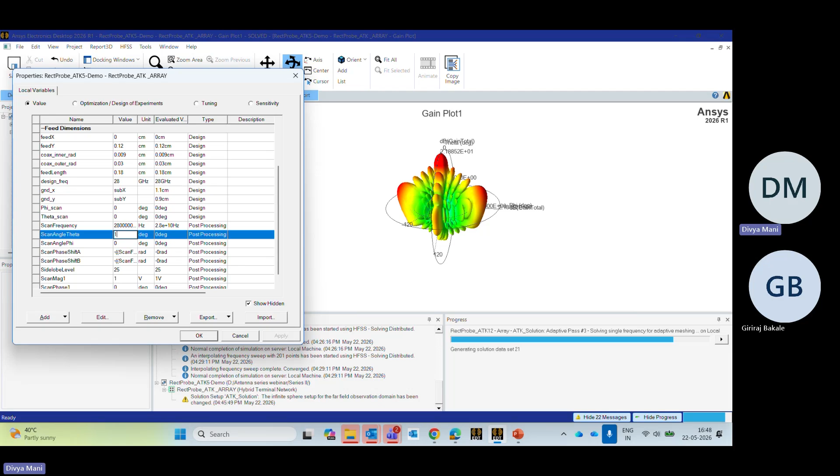So I'll go to HFSS design properties, and under that I'll have a parameter called scan angle theta. This is my scan angle theta. I'm going to steer my beam along the theta axis, steering it along 15 degrees, and give OK.

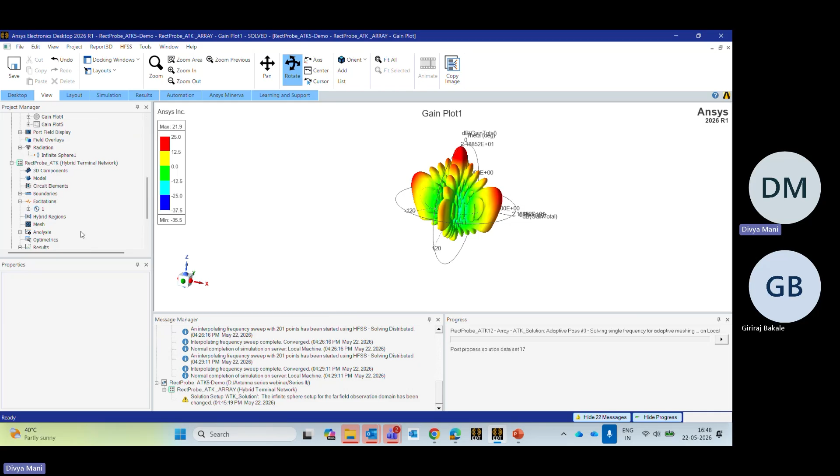The simulation is going on. Only once my simulation is complete will I be able to steer this beam.

This can be used for phased array applications. At 28 gigahertz, when my applications are dealing with 5G millimeter wave, I can have a focused beam and just connect with the users I want to reach. I don't want to waste my RF energy spreading power like a blanket, so I'm creating a focused beam and steering it according to the availability of the user.

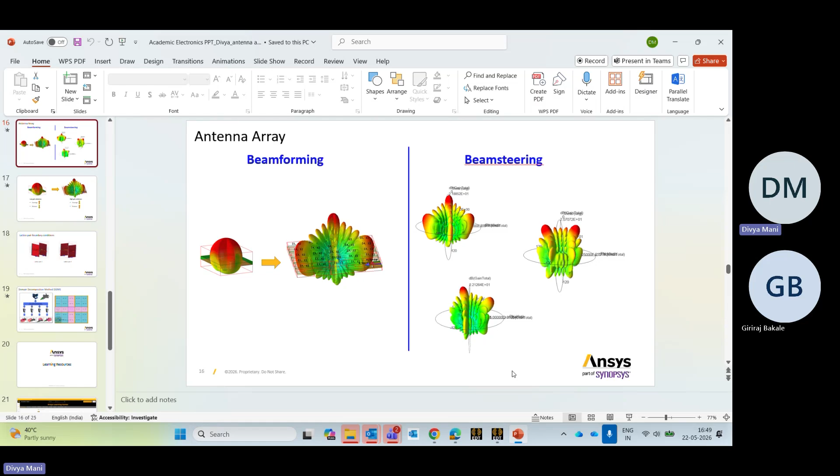And this is all about beam forming and beam steering.

I'll move on to learning resources. Since simulation is fascinating, there are a lot of resources available from Ansys, and you can start learning this. The first is Ansys Learning Center, where you can find a lot of Ansys Innovation courses related to different domains like electronics, fluids, structures, 3D design, optics, and many more.

Under electronics, you will find subjects like Introduction to Ansys HFSS, Basics of Vector Algebra, Magnetostatics in Free Space, Electromagnetic Wave Propagation, and many courses. Upon completion of the course, you will get a completion badge, which can be used in your resume for high visibility.

And then comes Ansys GPT, where you can ask your queries related to your simulations and come up with solutions easily.

And there is also Ansys Learning Hub. When you have access to Ansys Learning Hub, you will be able to read the concepts related to the theory and simulation part that is provided by Ansys.

For example, let's say we are going to work upon high frequency electromagnetics. There are concepts like antenna, RF and microwave, signal integrity, power integrity, EMI, EMC, which will have the theory part and also the simulation workflow, showing how you carry out simulations with respect to Ansys solutions.